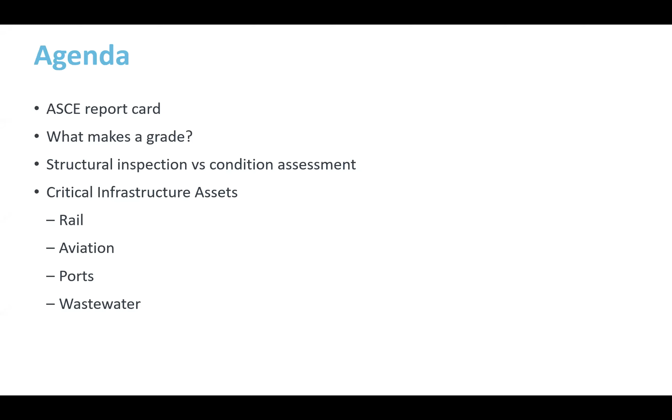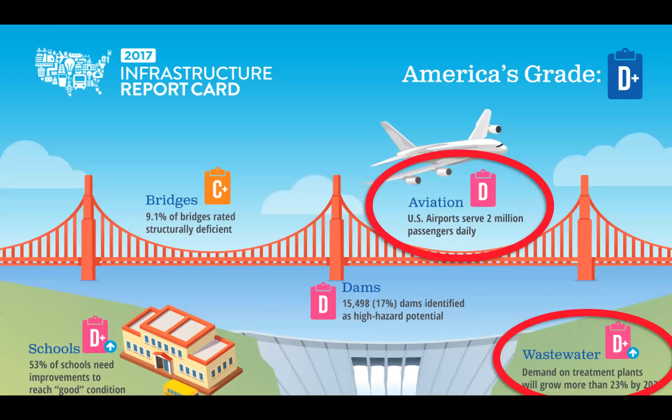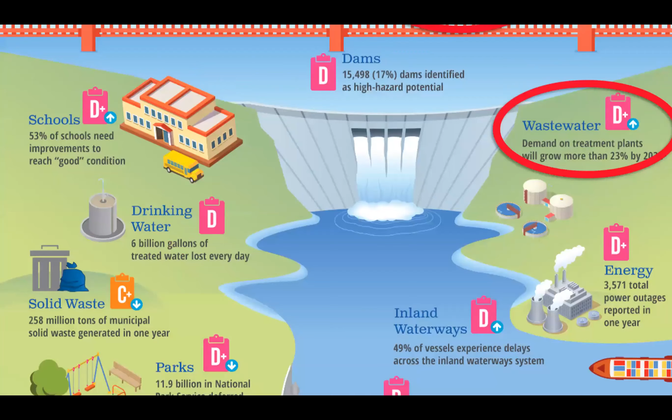So the report card, this is the 2017 report card. There's a nice graphic and exhibit about it. The items that are circled here are going to be the ones of focus on this webinar. So aviation nationally gets a D. Wastewater nationally gets a D+. Two other ones we'll be looking at are ports. Ports get a C+ on the national report card. And lastly, towards the bottom here, we'll be looking at rail, which gets a nice grade of a B.

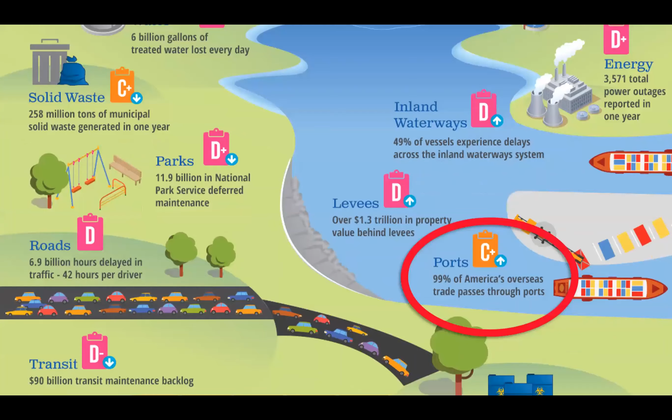Clearly, there's still work that can be done with all these assets. It's probably not the report card you'd want to take home when you're a kid to your parents, but nevertheless, it tells us that we still have a lot of work to do to keep our assets in good order.

So what makes a grade? How do they figure all this out and give these grades to the various assets? There's a whole long list here of items, as you can see.

There's capacity: does the infrastructure meet the current demand? Future demands. There's condition: what's the infrastructure's existing and near future physical condition? I've highlighted that one because it's going to be the subject of what we're talking about today.

There's funding: what current levels of funding do you have from various agencies in order to support these assets? There's future need: what's going to be the cost to improve the infrastructure, and the future funding prospects addressing the need. I've highlighted this one as well because it'll be a subject of today's discussion.

And there's operation and maintenance: what's the owner's ability to operate and maintain the infrastructure properly? We've built a whole lot of infrastructure in this state and in this country. What do we do about maintaining and operating it?

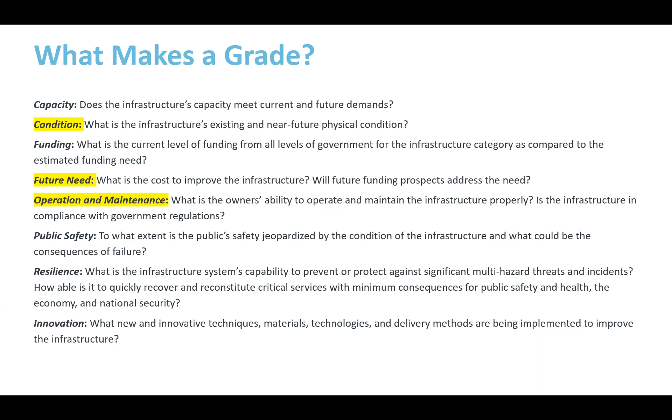A B is good, adequate for now. A C is mediocre, requiring attention. A D is poor, at risk. And lastly, an F is failed, critical, unfit for purpose. We certainly don't want to be in the F, really don't want to be in the D. We'd at least be in the C and trending towards a B. But this is a way of establishing the condition of our various assets through a grading scale.

I mentioned before, I'm a structural engineer, so that's my slant in looking at these assets. So I want to point out something in particular. It's maybe perhaps a nuance, but there's a little bit of a terminology thing here.

And that is, structural inspection is actually reviewing and documenting the condition of a structure. So you go out, you make a site assessment, you take field notes, you review it, you document all the distress conditions. That's the inspection process, documenting the current state.

There are generally 5 different types of inspections. If you follow the bridge world, they kind of established this first, and I'm going to sort of follow this through as we look at the different types of assets.

The first type of inspection is an initial inspection that's done when the bridge is first constructed. So you probably won't be doing that one again. It's just when you started out.

Routine is what's mandated by federal guidelines or other regulations: how often do you have to look at the bridge, what frequency, and what do you have to record when you're looking at the bridge.

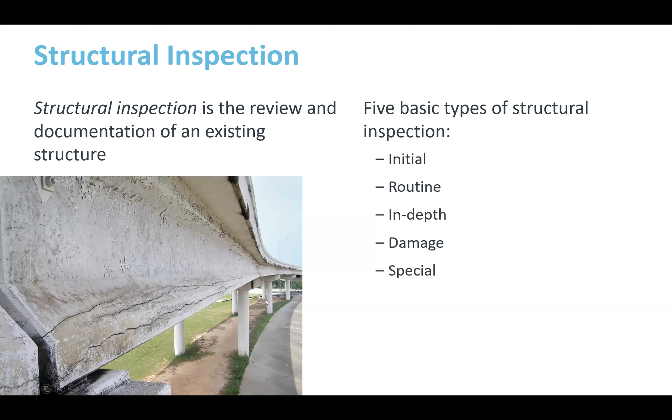That was inspection. Now condition assessment is the other term. So after you've gone out, inspected the bridge, and documented everything you see - distress and so forth - condition assessment is the collection of all this information so that you can make informed decisions. And those informed decisions typically come around costs and budgets - what is the most important item to take care of?

Prioritization comes to mind as we look to take care of these assets. Management decisions come into play: development, evaluation, testing of new repair and maintenance techniques, corrective actions that need to be done, life cycle cost analysis, project budget priorities and scheduling, long-term allocation, funding allocation, long-range planning. These are all management type decisions.

So we have all of these assets, and in many cases we have way too many assets. How do we prioritize them? How do we group them and decide which ones we want to tackle first? So you have inspection feeding all this data into this process. Condition assessment is the decision-making process of ranking these, prioritizing them, and making the tough decisions with the limited funding that you have.

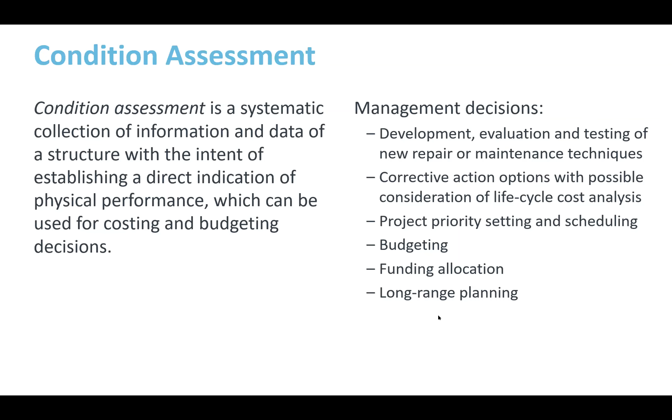You'll notice with aviation, it was trending better in Texas - you go from C+ to a B-, which is great. Nationally, not so good - we're sitting at a D.

Ports were covered in previous report cards. It went D, D, C, and then the last report card was not reported, presumably because there's not enough of a concern about ports - they're not worried about the ports to report on it. Nationally, C+. Rail was not evaluated in the report card, but we're still going to talk about it. Nationally it gets a B, which is the highest on the list.

And lastly, wastewater. Wastewater has basically been trending a little bit down - it's C minuses and then to a D, nationally a D plus. So we got a lot of work to do on this.

If you'll recall, the last time I gave this webinar a few months back, I featured 4 other assets, which were bridges, dams, drinking water, and energy. So we're hitting 4 more on the list. I'm almost running out of options after that, so part 2 may be the last one, but we'll see how this goes.

All right, so let's jump into it. Let's talk about these different assets. The first one I've chosen is rail, and there are a couple of reasons why I'm introducing it first - in part because it has a great grade, and it doesn't have a lot of reporting in the statewide report card, but we'll talk about that. Nationally, $27 billion in improvements in 1 year by the freight railroads, basically highlighting the amount of expenditure to keep the rails going.

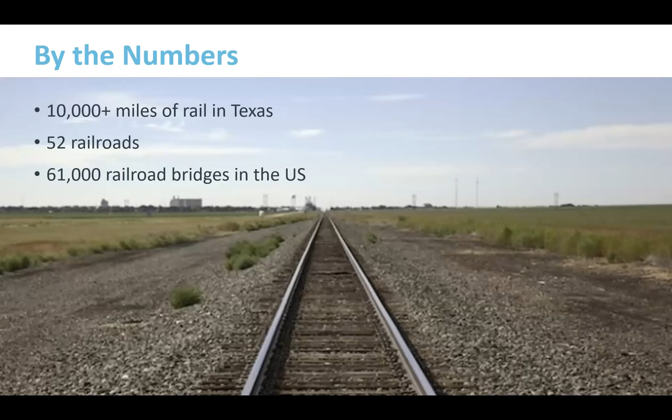If you've come across that agency or codes before, I'm going to talk about railroad bridges in terms of how they would be characterized if they were highway bridges, but there are some tweaks to it because it's carrying rail. So if we go back to the guidelines set up by the Federal Highway Administration, basically the National Bridge Inventory Guidelines, they've set up various coding for conditions to evaluate bridges. Whether it's a highway bridge or a railroad bridge, you can basically consider them to be very similar.

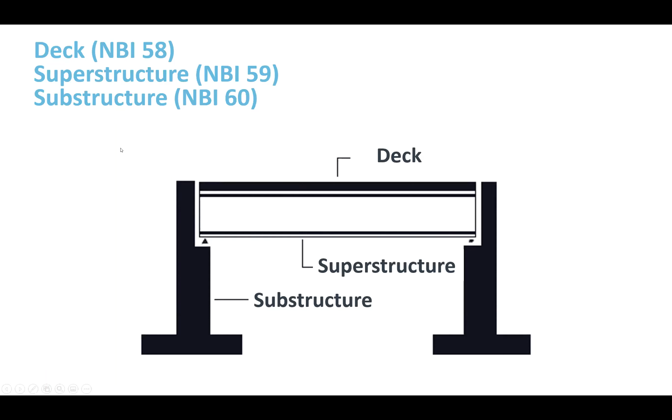So this is very much following just the bridge guidelines for highway bridges. There's a condition rating established, and I covered this in the previous webinar as well when we were talking about highway bridges. There's a rating system basically from 9 all the way down to 0.

So if you're structurally deficient, you're a 4 or less on a particular rating, whether that's the deck, superstructure, or substructure. A 4 is poor condition—you have advanced section loss at that point. And if you work your way down even beyond that, 3 is serious condition, 2 is critical, 1 is imminent failure, and 0 is failed.

It's basically on the ground at that point or in the water. You certainly don't want to get it to that point. You want to maintain these and keep that condition rating going up.

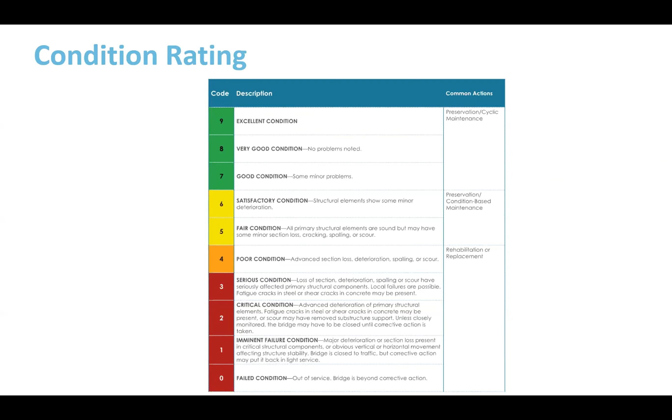Now, in the context of railroads, this all can still apply. There's no reason why this could be any different. It's just that you're now carrying rails up on the bridge, not trucks and traffic like you would with a highway bridge.

So if it's the deck, decks are a little bit different with railroads, and in some ways maybe they're a little bit more complicated. You have timber rail ties with the train rail.

You have a reinforced concrete deck in this particular bridge. The superstructure is pre-stressed concrete. It also has some steel girders associated with it. The substructure has columns, piers, and abutments, channel protection, and so forth.

In this case, the deck is getting a 5. It's actually the worst part of the bridge, the part carrying the rail, which is of concern. It's given a fair condition. You're not quite structurally deficient, but certainly some action needs to be done.

The other components here are rated 7s, so they're generally good. In the average of things, this is a little bit misleading, but a 5 is not quite the average of 5s and 7s, there's a little bit more going into this. But generally, the bridge is rated fair because the worst part of the bridge is fair. You want to raise the alert that you're only as good as your weakest component in the bridge, and in this case, that's the deck. So it's carrying a 5 rating overall for that reason.

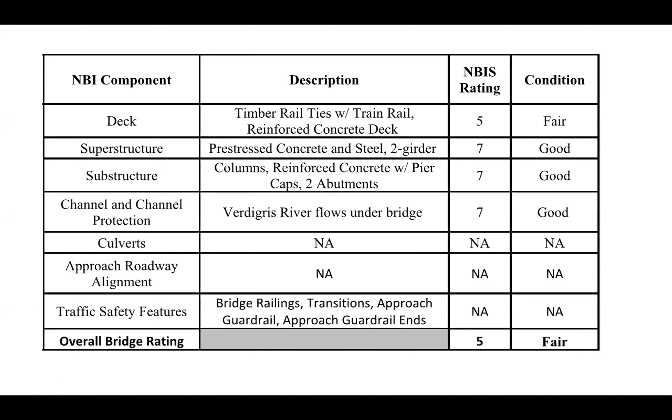This all feeds into the condition assessment process at the end. So AASHTO came up with what they call the CoRe, the commonly recognized elements. They went element by element through a bridge and basically allowed you to give different conditions to every single element in the bridge. Those condition states go from 1 to 4. A 1 is good, I know this numbering system is backwards in the condition rating scale, but bear with me. A 2 is fair, a 3 is poor, and a 4 is severe.

Now this is on an element basis. Common actions: if you're on a 1, you're just doing cyclic maintenance. If you're on a 2, now you're starting to have condition-based maintenance, there's a certain item you need to address on a regular basis. You get to 3, you have condition-based maintenance, you might be doing rehab at this point, you might even be doing replacement of this particular component. And lastly, when you get to 4, you're basically rehab-replace. You don't want to get to 4 with any of these.

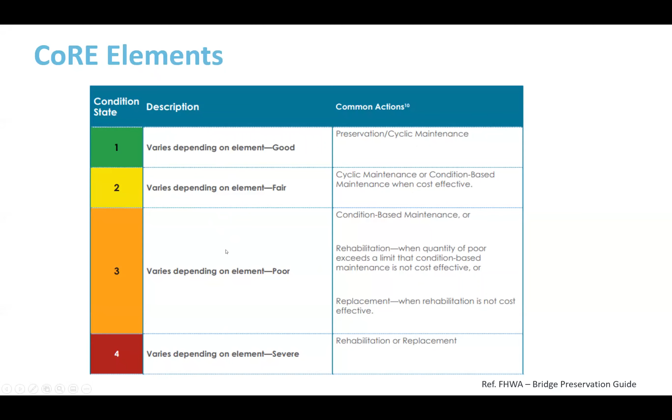Now I can pull out any particular element. We're talking about railroad bridges here, so I'm going to pull out element 107. These are already pre-established in terms of rating. That's a steel open girder or beam, and it's measured in feet or meters if you prefer. It's one of the national bridge elements.

So why did I pull this one out? Well, railroad girders tend to be steel, they don't have to be, but I'm just using it for demonstrative purposes. You're going to quantify the amount of deterioration along that length, and put it into these different condition states. So how much of that beam falls into condition state 1, 2, 3, and 4, and that's going to help you prioritize what you need to do with the particular bridge.

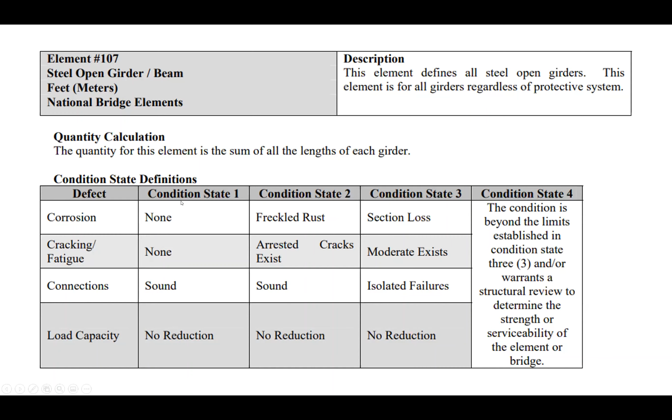For steel, your items of concern or defects are corrosion, cracking, fatigue, connections, and possibly load capacity, if you have concerns about its ability to carry the rail, the loading that's on the rail. You can see definitions for the different states of corrosion, cracking and fatigue, and so forth. But the goal here is to take each component of that railroad bridge and document how much of it falls into each one of these condition states.

There's some various definitions as well and some feasible actions. If you were in condition state 1, you probably wouldn't do anything but just protect it. If you were in 2, you may not do anything, protect it. Condition 3, probably getting that repair rehab. Of course, you can always do nothing if you're an owner, but it's not a very wise thing to do sometimes. Lastly, condition state 4, you have the do nothing option, but more than likely you're going to be rehabbing and replacing.

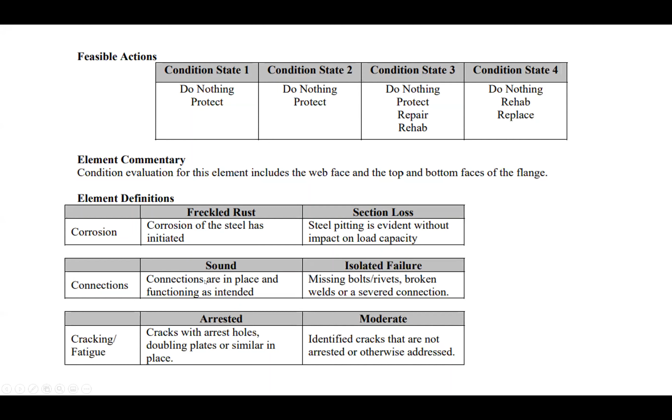There's some definitions here for different types of distress, defects that you see, section loss and rust and so forth. If we look at an actual bridge, this is kind of how the rating shakes out when we're looking at a component-based level. So in this case, this table, we are looking at the deck. So again, the deck is carrying the rail of the bridge and whatever structural components are necessary to support that rail. It's actually a pretty complicated list.

If you think about a deck on a highway bridge, it's a concrete deck. A concrete deck takes vehicle traffic. You may have parapets or railings on the side and other things. This is getting a little bit more complicated here. You have the steel deck, which is the rail itself, quantified and in various condition. You have the timber deck and the rail ties, which are supporting the rail directly in various condition ratings, and they're done, in this case, each, whereas the deck is done per feet.

And then you work your way down. You have a reinforced concrete bridge railing on this particular bridge. You have a concrete curb, steel deck, bridge metal railings, and so forth. You see each one of these elements being evaluated has a different number to it, and it has quantities, it has units that you would evaluate them in, and then you would put the units or the amount of particular item in each one of these condition states.

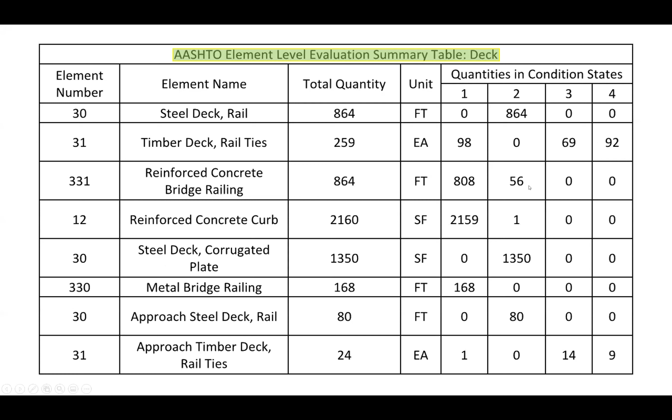So this looks fairly complicated for a deck. If I were to look at the superstructure, it looks a little bit better. This is the main structural system supporting the deck. You have various element numbers as well, and the different types of structural components here. I talked about 107 before, which is an open girder steel beam. Here's an example of it. It happens to be 360 feet of it, and all of it is in condition state 2. Nothing in 1, nothing in 3, nothing in 4.

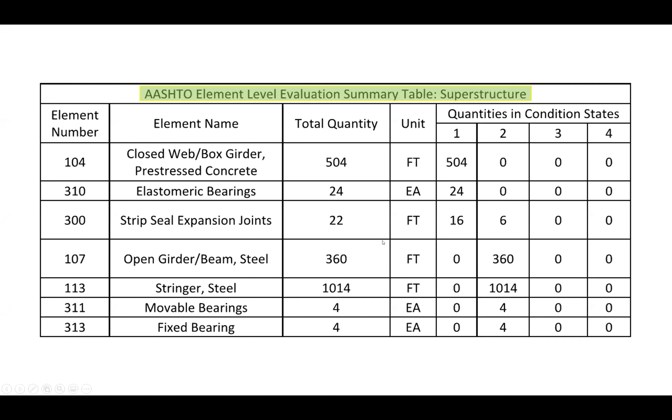And lastly, if I look at the substructure, there are various components that make up a substructure for a rail bridge. You have the abutments, which happen to be reinforced concrete in this example. You have pier caps, columns, piles, steel supports, and wing walls with reinforced concrete. They all have quantities themselves, either measured in feet or each or square feet, depending on what we're talking about. Each one is evaluated during the inspection process and quantified in the 4 different condition states.

This seems like a whole lot of information that we're pulling here. Keep in mind, we're looking at the deck, which is carrying the rail. We're looking at the superstructure, which has all of its components, which is carrying the deck. And lastly, we're looking at the substructure, which is carrying the superstructure. So the load works its way down all the way to the ground. All of these are being quantified during the inspection process. They're being tabulated and pulled together. This is going to feed into the condition assessment process. So for every one of these rail bridges that you're looking at, you're going to collect all this data.

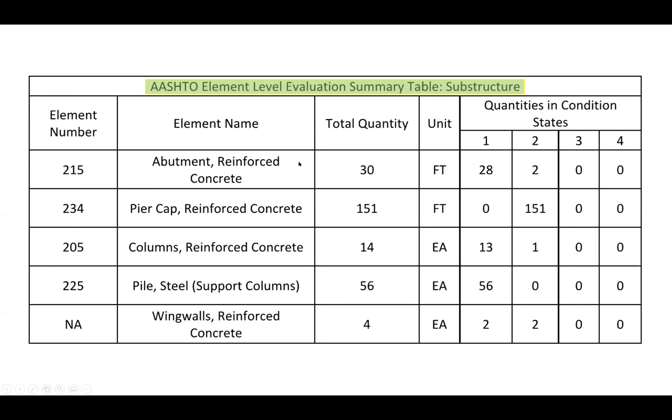So what I'm suggesting here is, although it is a railroad bridge, you can follow suit with what's done for highway bridges and basically collect all this information, and let's come up with a condition rating number, and then we can rank those and then establish a threshold of how much we can actually get to at a given time, given budgets and funding. The formula is quite simple.

S2 is your functional rating. That's the serviceability or functional obsolescence of it. There's a whole long list there of items for bridges. This can be modified for railroads because some of the items wouldn't be applicable here, but you would add other items in.

Lastly, S3 is your essential use rating. That is, how important is this particular railroad bridge? Now, I started this out saying critical infrastructure assets, so there's kind of a hint. Yeah, they're all important. Yes, but how important beyond all important?

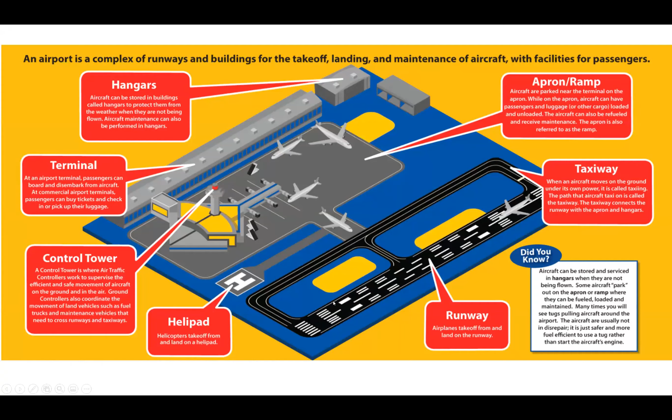Talking a little more about pavements, I pulled this example from Chicago, but we could pull it from anywhere else in the country, just to give you a sense of what makes up the pavements. Typically concrete on top, Portland cement concrete on the order of 16 to 21 inches, pretty thick. I've seen it even thicker in various airport pavements. That sits on an asphalt base, a permeable asphalt base, and a lime soil base. So add it all up, and you've got 40 to 45 inches of pavement made of different constituents. Rightfully so, it takes a lot of abuse from very heavy planes driving, landing, and taking off, plus abuse from the elements.

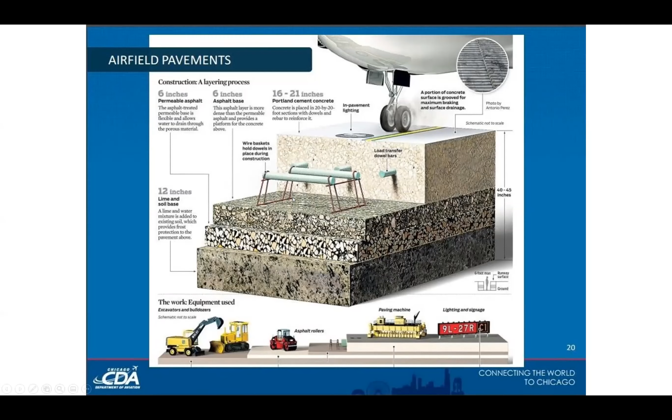You can do a condition rating system on airport pavements, just like the other items we've discussed. It's a critical infrastructure asset, just like the others. If you don't have runways, you can't take off planes, move equipment around, or move freight and people. So it's critical infrastructure. Fortunately, the FAA has established what the defects are, the reporting procedures, and how we come up with the condition of airfield pavements. I'll show you excerpts from the federal FAA guidelines, coming out of AC 150 and 5320 for pavement evaluation. They have a whole guideline on this.

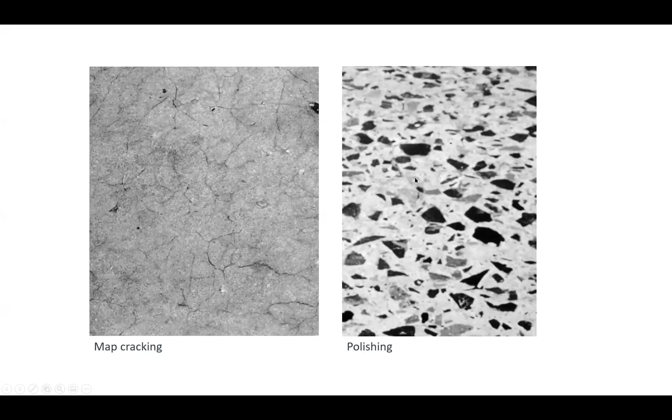I'll show you some of the defects. Map cracking is the first one - if you were to wad a piece of paper up and then unfold it, you get all these little patterns, they call that map cracking. There's polishing, where the aggregate is actually exposed and shiny in some cases. That's never a good thing.

You have pop-outs, where the aggregate literally comes out of the surface, as the name implies. This is particularly concerning because when you're flying aircraft, landing and taking off, there's utmost concern about what they call FOD, foreign object debris. You do not want jet engines to suck any of this in because it will damage them and could have safety implications. So you're very concerned when you have pop-outs and other distress in the pavement - you don't want any debris pulling into the plane engines.

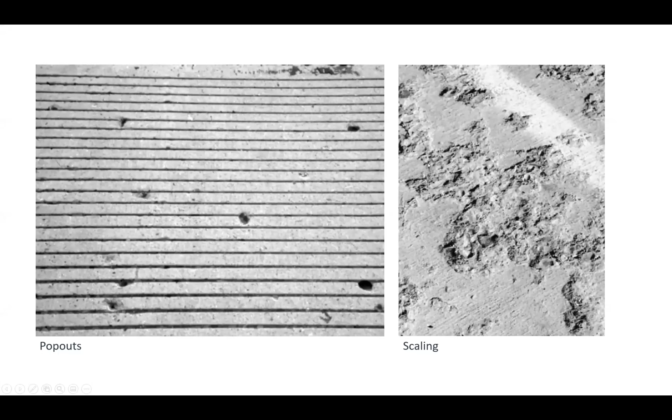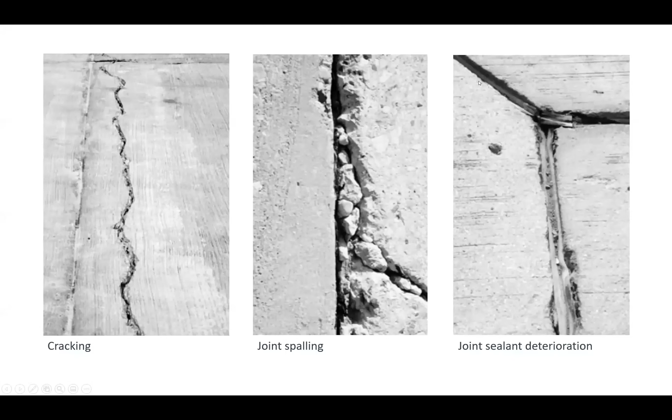Scaling, as the name implies, is the removal of the surface of the concrete, and you can see the pitting that occurs as a result. Cracking is cracking, concrete cracks. Joint spalling is unraveling at the joints - you can see little pieces of concrete debris, and you don't want those going into engines either. That's another example of FOD. Joint sealant deterioration also occurs, since there are lots of panel joints on these pavements because they go for a long distance and have to be jointed.

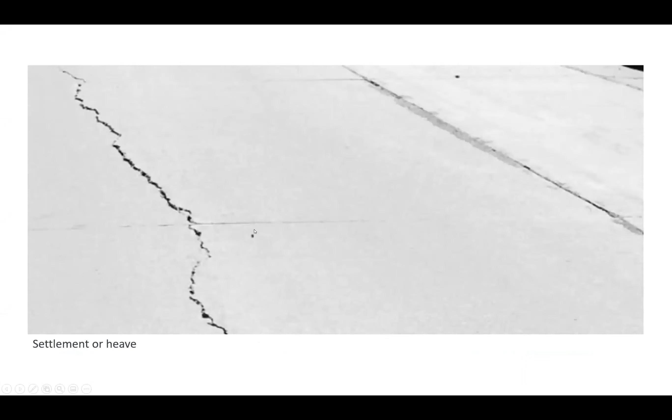Settlement, or heave, is literally where one part of the pavement moves differently than the other - it could be up or down, depending on the subbase or soil conditions below. And lastly, faulting, where entire panels of pavement drop, creating these faults or lines. That certainly is not good for travel on the pavement.

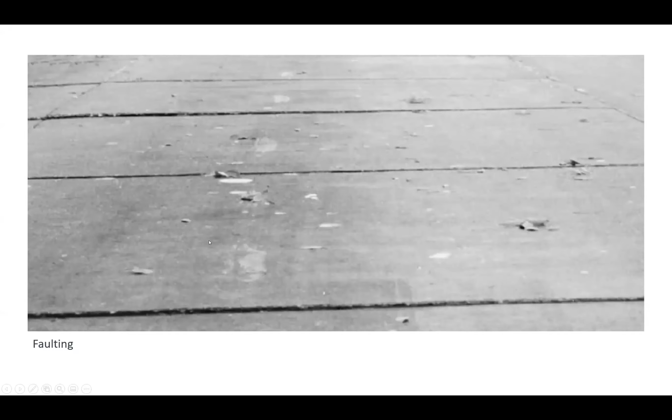As I said, the FAA has already come up with condition rating guidelines, which is excellent. They have their own rating system, except it's not from 9 to 0 like in the bridge world - it's from 5 to 1. They spell it out quite well, and it's all in terms of visible distress. I think that's important to point out: if you're inspecting this, it's what you see with your eyes, but not necessarily with other equipment, which could be a follow-up inspection procedure.

If you're a 5, you're excellent - it's probably new pavement or recent rehabilitation, less than 5 years old typically. If you're a 4, you have hairline or sealed cracks, 1/8 of an inch wide or less, map cracking, maybe some pop-outs.

You're probably a little over 5 years old at this point, given the wear and tear, minor spot repairs, and crack and joint sealant repairs. This is maintenance items—that cyclic maintenance that goes on in the bridge world. Here it is occurring with pavements.

If you're a 3, you're fair. You've got several slabs broken into 2 pieces, corner cracks, wider cracks. First sign of significant slab cracking and corner cracking is generally of concern.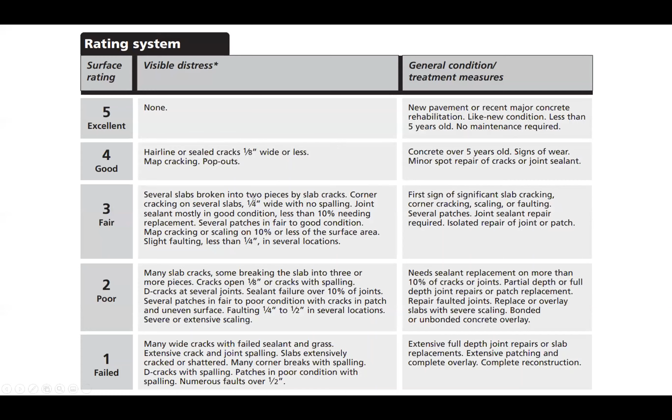So the condition assessment—I'm going to lobby that we should use the same process we use for bridges. You do a condition rating: you add up S1, S2, S3, and subtract S4. For airport pavements, what's S1?

Well, it's a structural rating of the pavement. So you would look at a condition rating of the runway, the taxiway, the apron. Like I said before, if you wanted to look at the terminal and do an assessment, you could. If you had an automated people mover, you can do an assessment of that too. I'm sure you can come up with other parts of the aviation facility for a condition rating and evaluation.

S2 is your functional rating—what's affecting the function of the pavement. You've got the cracking, polishing, pop-outs, spalling, failed sealants, settlement, faulting—all the things I listed before out of the FAA pavement manual.

And lastly, the essential-for-use factor. This is a port of entry more than likely, so airports are pretty critical—you're going to get your full 15 points doing this, but there could be factors that affect that. And you subtract off S4, your special reduction. In this case, the type of pavement may have redundant features. You rank all these up, and then set a threshold, and if you don't have a particular condition rating, you're going to be prioritized and addressed first.

So again, if you had 100, you're perfect, you're new—I haven't ever seen 100 before. If you have a 0, you're in critical condition. You can rank all these particular elements of an airport or multiple airports and establish which ones need to be handled first. Obviously if you got 100, you're good to go, but there's a threshold depending on your funds—you'd draw the line and say everything below this needs to be addressed.

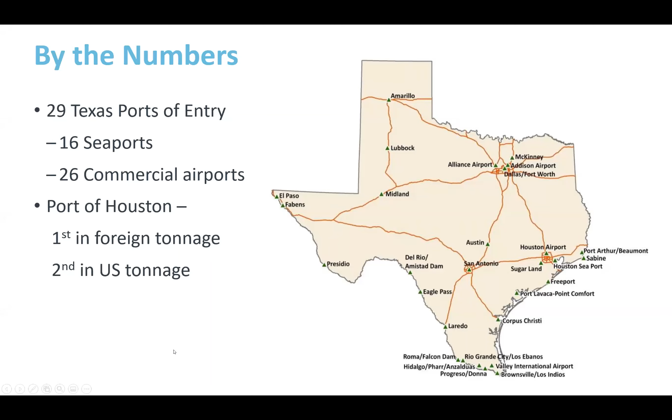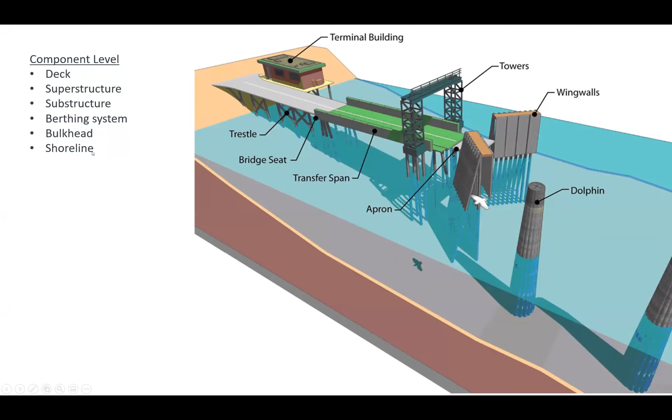Probably what's most important for the ports you might be looking at is to look at it on a component level, similar to the bridge world. You can break it into components: deck, superstructure, and substructure. The berthing system, the bulkhead, and the shoreline are probably the most important ones to look at when evaluating this. So for example, if we're looking at a wharf, we're looking at the underside. They're typically made out of concrete, though they don't have to be. We're inspecting it, probably on the water underneath the wharf, or there's a platform down below, and we're looking at defects in concrete distress.

So you can go element by element and identify what the defects are and how much falls in each condition state. I could take a particular part of the wharf we were just looking at and document cracks, spalls, efflorescence, if I had concerns about the load capacity. I would take a quantification of that and put it in each condition state, just like I showed you with the railroad bridges—you can do the same thing for a wharf. You'd have a certain percentage in condition states 1, 2, 3, and 4, going element by element, then feed all of that into an overall condition rating to inform the condition assessment process.

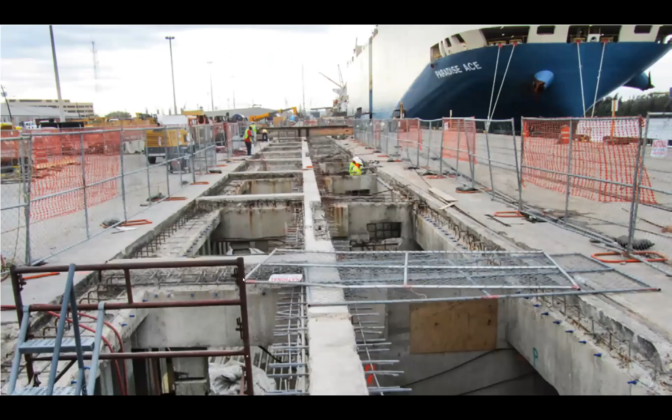Now, if it's like the Port of Houston and various other places, there's always a demand to upgrade. You've got bigger ships coming in, heavier cargo, larger cranes, and so you get the opportunity to do upgrades like this. In this particular case, the slab of the wharf is being upgraded and strengthened in order to accommodate new cranes that are coming through and new freight.

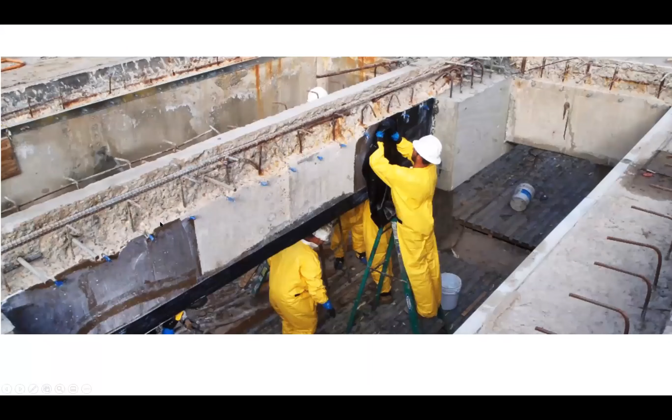In the second case, this is carbon fiber strengthening occurring to upgrade the beams of a wharf in order to take more capacity for gantry cranes coming through. You can see some of the corrosion occurring on the reinforcing steel here.

Same process applies for ports. It's very widespread, lots of different parts of a port. I chose to show you wharfs, but generally you'd follow the same condition rating process. Condition rating is S1 plus S2 plus S3 minus S4. S1 is your structural rating, S2 is your functional rating, S3 is your essential rating, and then you subtract any special reductions. For a port structure, you might be looking at deck, superstructure, substructure, berthing system, bulkheads, and protected shoreline as your condition rating items if you're structural.

In terms of serviceability, we're looking at cracking, concrete cover, corrosion, spalling, and load capacity. Essential use - it's a port of entry, so it's probably pretty important to keep it going, but there could be cases where it's not being used as much as some other parts of the port. You simply add up the S1, the S2, and the S3.

Special deductions could be the type of structure, the type of port that it is. Is it concrete? Is it steel? Is it timber? Various types of building materials, and then what safety features are in there to protect it from impact from ships, for example, would weigh into the condition rating.

A perfect score is 100, a 0 is critical condition. You would rank all these particular parts of the port, establish a threshold that if you get below that, then you would have to take care of it in a prioritized manner. That's all part of the condition assessment process, just like we talked about with the other assets.

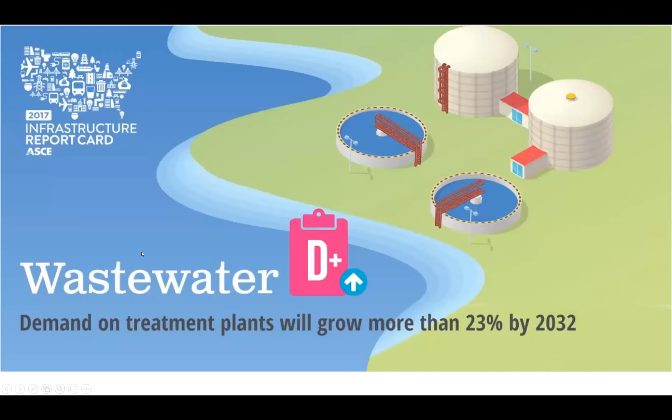The last one I'll talk about is wastewater. It's kind of switching gears here - I'll talk about ports, no implication here in wastewater, they're unrelated. Nationally it gets a D+. There's a note here: demand on treatment plants will grow more than 23% by 2032, so there's a lot more demand, a lot more people using and generating wastewater. Texas wastewater, not so good, a D - its national average was D+, so Texas is actually worse than the national average.

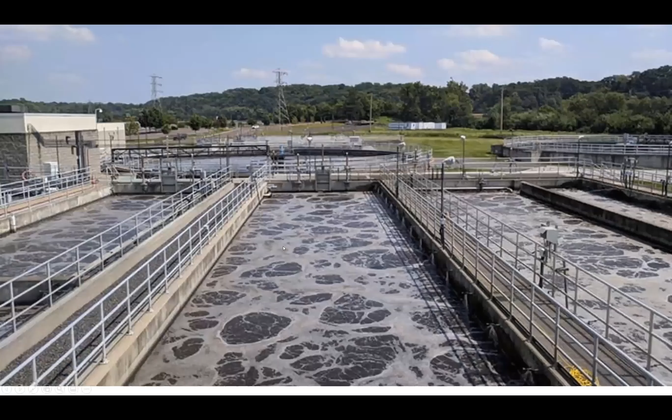Here's your typical wastewater treatment plant in Texas. You've got various tanks being used as part of the process of treating wastewater before the water is returned back into service. You might have aeration tanks, like what's shown here - this is all being stirred around in order to aerate it as part of the biological process that breaks down all the sewage and sludge. And you might have clarification tanks as well, where they're spinning around in order to clarify the water.

Just to give you an example, let's talk terminology for a minute. If we're going to evaluate and inspect this, we need to establish what the different elements are that we're going to be rating. In this case, for a clarifier, we have the rake arm, the basin slab - typically concrete - basin wall, typically concrete, support column, drive platform, and railing. During the inspection process, you'd go through each one of these and assign a condition rating to it, very much like what's done for the other assets.

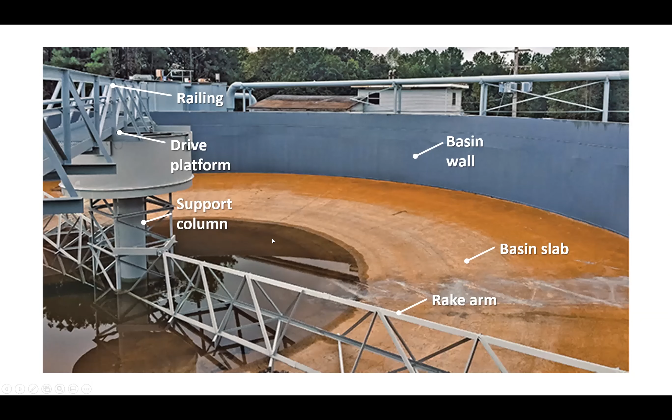And you would keep your detailed notes. If you wanted to go to a more detailed element basis, you could, using the same premise as the other assets - you could go element by element. Let's take the basin slab, for example. You could note the defects that are in the basin slab: cracks, spalling, delamination, efflorescence, or some concerns about load capacity.

It would fall into different condition states depending on the severity of what you saw. You would quantify each one - for the cracks that you saw, how much falls into condition states 1, 2, 3, and 4, or other types of defects. And all that information would be fed into the condition assessment process.

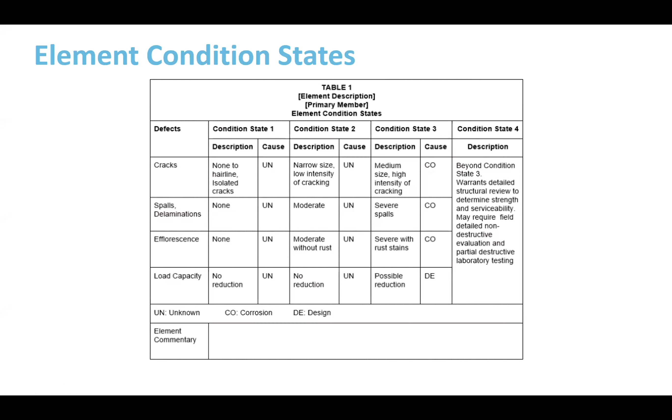So you can imagine, you could take this as far as you really want to. You could go on a tank by tank basis, or within a tank look at particular items and quantify them. It all depends on the level of detail investigation you want to do, and whether you're considering this a routine inspection or an in-depth inspection - that depends on the type of inspection occurring. There could be damage as well if you're going back and inspecting. But nevertheless, you're going to sum all this up, and just like the other ones, I suggest you follow the same process: establish a condition rating for the wastewater treatment plant.

Again, I'm looking at the structural parts of this. You could certainly make an argument for the water and treatment parts of this and various other parts of the plant that might be of your interest. And you could establish a rating scale in a similar manner.

S1 are your structural ratings. So your structural components in this case, if we're talking about the clarifier tanks, basin slab, basin wall, support columns, the rake arm, you may have a baffle wall, driving platform, and railings. And you would give condition ratings to each one of those items.

If you're talking about the functional rating, similar to other things with concrete distress, you could have cracking, concrete cover, joint issues, tank capacity issues, chemical process issues, whatever you want to feed into the function and serviceability of that particular tank. As far as it's essential for use, well, it's being done for water treatment. Generally that's very important, but there could be instances where it's not super critical, where this plant could actually come offline for a little bit.

But generally they're running at capacity and need to be used, and they're essential to the operation of the infrastructure. And lastly, there are some special reductions that could be had, the structure type and the safety features that are involved with this. The percentages here are arbitrary.

These are set up for bridges, the 55%, 30, 15, and subtracting off 13. You could certainly come up with your own system. You may have a local owner operator who has their particular preference for numbers and ranking. Sure, no problem. It's certainly up to you and your judgment when you're evaluating these.

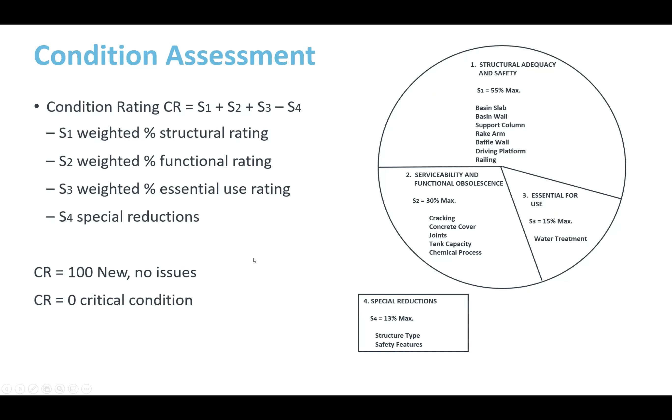And as I said, the report card is going to be revised here soon. We're going to see a new report card so we can start this process all over again. I'm hopeful that our letters are going to improve, but we will see where we stand.

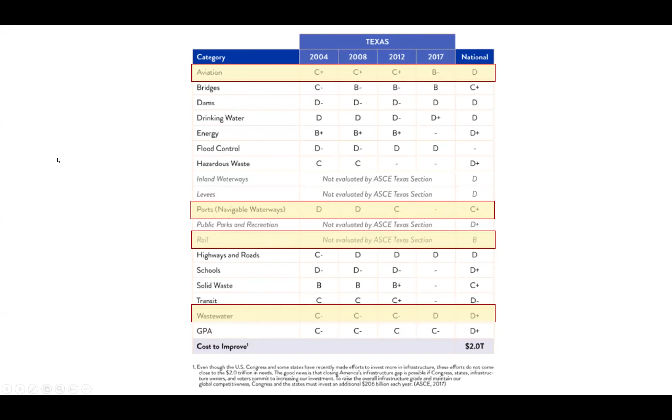All right, Mark, thank you. The first question is concerning the wastewater. Does it mean that a lot needs to be done for making safe disposal of wastewater? Yes, I would suggest, this is somewhat my bias, my interest is on the structural side. So on the structural side, they're generally in good condition. That's not the main concern. The main concern is more on the water treatment and processing side of wastewater. And I'll leave that to other experts to opine on.

All right, thank you. And the next question is: does revenue generation have higher weight, or does exposure to the public have a higher weight, for the current good or bad rankings? Yeah, great question, it's so hard to predict. Generally, we don't get a lot of press as engineers until something goes bad, something goes wrong, and it's portrayed in a certain way in the media. And that could be slanted, skewed, or whatever it happens to be. And so in that given moment, it's critical because life safety is going to be played up to no end. And then at other times, dollars are important as well. I don't know, that's a great question. I don't have a really simple answer for it, but they're both important and they're both very situational at times.